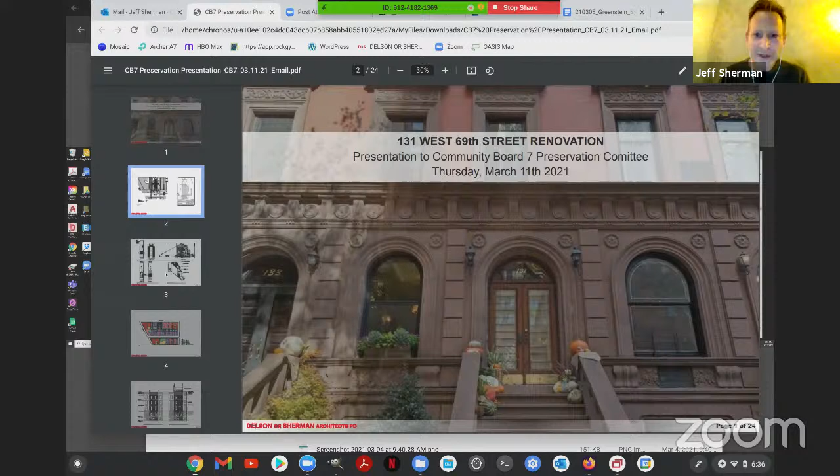Okay Jeff, you'll make the presentation? I will, thank you so much. I wanted to thank you for the opportunity to present this project to you tonight. I will share my screen with you now. Oh, Susan is also the woman who looked at the site. This is the front facade of the project, 131 West 69th Street. Our renovation includes a rooftop addition and an extension on the rear. You can see them both modeled there.

Excuse me Jeff, for interrupting. Yes. But I found when I was looking at the first version of these slides, the print was kind of small to begin with. If you could please use the view setting so it's more full screen, that would help us a lot. Absolutely, or at least it would help me a lot. Thanks, and maybe I can zoom in a bit too. Great.

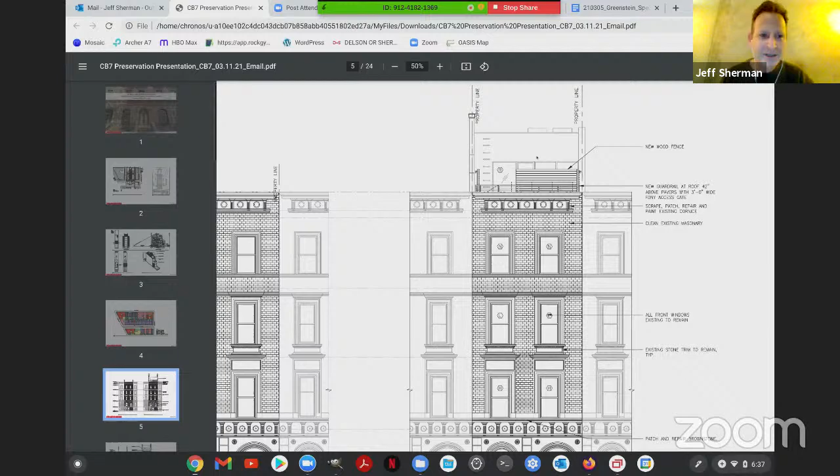You can see the front facade really, the only thing that changes of note is the addition on the roof, which is set back from the street to the point where, at least from the other side of the street, which you can see right here, that is invisible from the opposite side of the street. Although you'll see from the mock-up photographs that some of these extensions of the neighbor's flues are visible.

Can I ask a question right away? I'm sorry to jump in, but are the mock-ups still up there? They are. I guess you're pleased to hear that because I tried very hard to see them. They're up there, and they'll be there at least for a month.

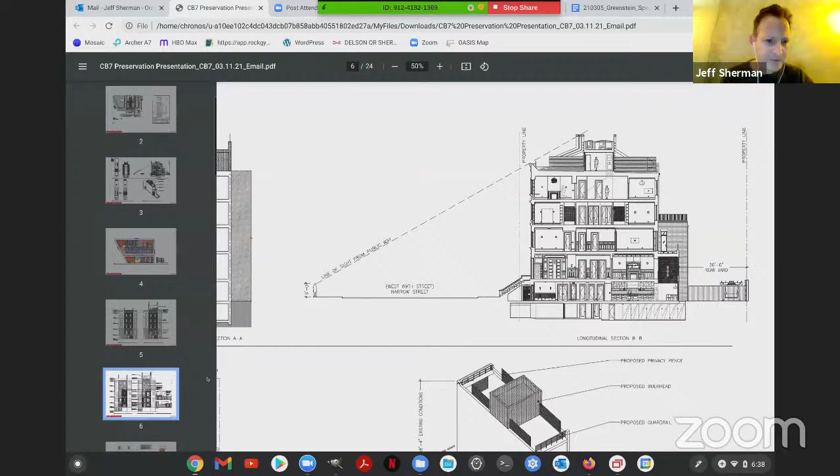So let's see, the other thing to see is... Is there a way to get rid of the preview panes on the left side of your screen? Yes. There we go. Great.

This is the existing rear elevation, and this is our proposed rear elevation. So we're adding a small extension into the sort of crotch of the building, and there you see our rooftop extension as well. We're increasing the window sizes at this rear extension, and then there are perforated metal panels between the windows here.

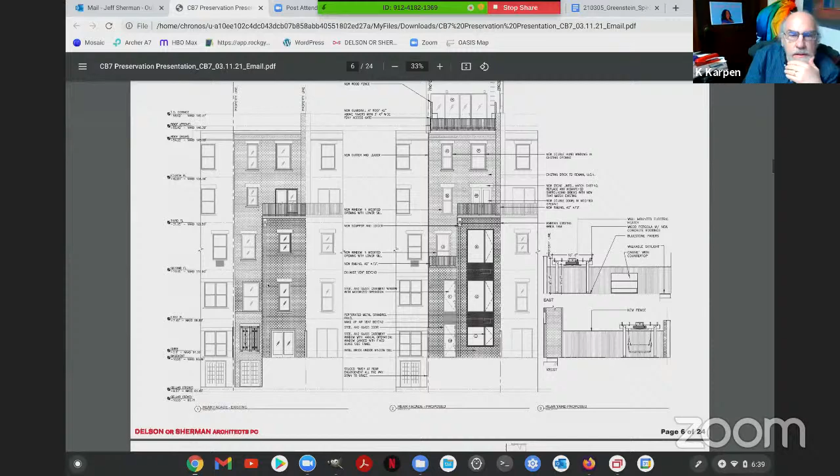So on those two floors, are you filling in where the L is? Is that what's happening? Does it come out to the face? Yes, we're filling that. Actually, it doesn't come all the way out to the face of this wall, it's set back a bit from there.

Why perforated metal panels as opposed to masonry? Well, part of it is to sort of unify the fenestration on the addition, but we also have quite a bit of ventilation that we need to get in there, and so the perforated panels allow us to hide a lot of ventilation, so that you're not seeing a bunch of grills on the rear facade. Gotcha, thanks.

We're also, I should say, adding a series of outdoor decks. There is an existing one there, but up on the rooftop, we're adding a deck. And then down at this level, we're also adding a deck.

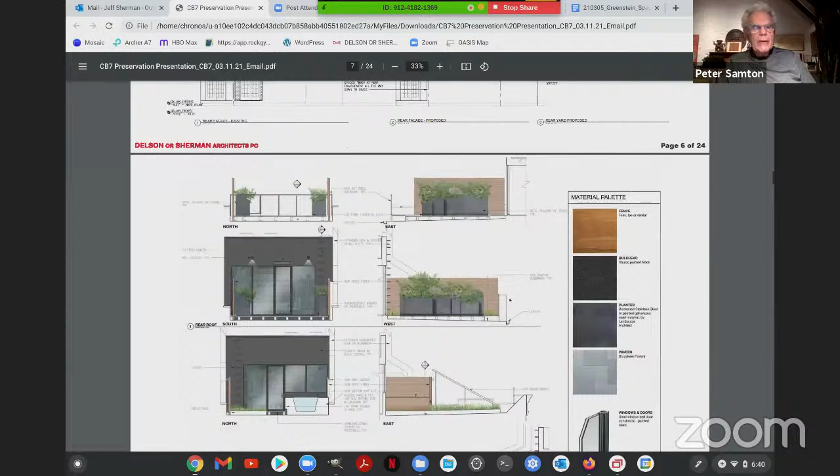Some renderings of the rooftop extension. It'll be black stucco with some matching black metal planters.

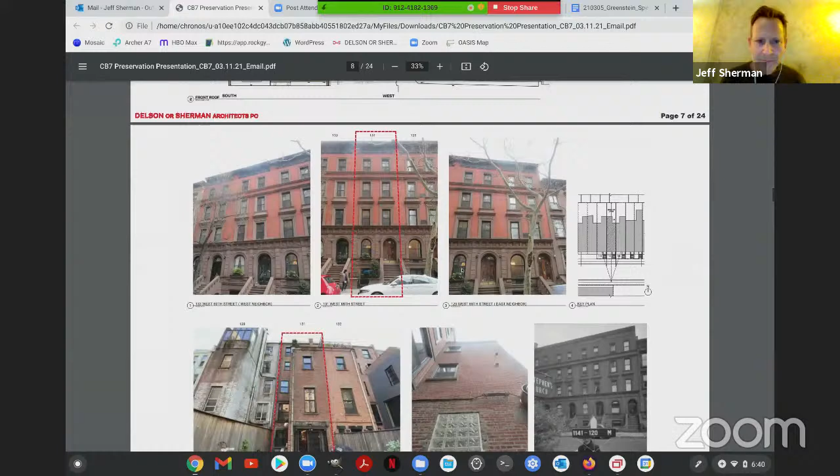Some contextual photographs to show you the existing building and the block, and some more photographs of the rear, the tax lot photo as a point of reference.

A series of window details that I'll scroll through because I'm not sure how interested you are in the window details. This is basically replacement windows at the front facade.

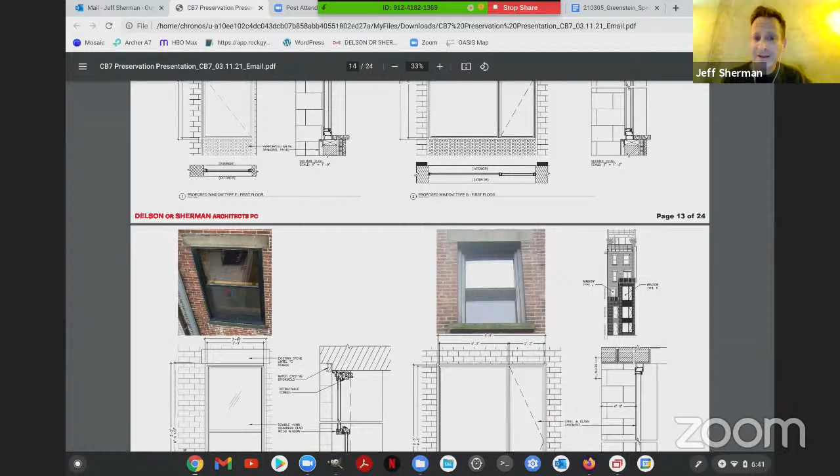Are the windows on the front facade being replaced by a staff level approval, or are we asked to comment on that? I believe that is a staff level approval, although they haven't confirmed that with us yet. Are you replacing them with... well, maybe we should ask, in case the LPC says that we should do that.

We are replacing them in kind, so we're not changing the size or shape or type of the openings. There will be new wood, painted wood windows with matching brick molds, and they're double glazed and in better shape than the existing windows, which are kind of falling apart. It's painted the same color? Yes.

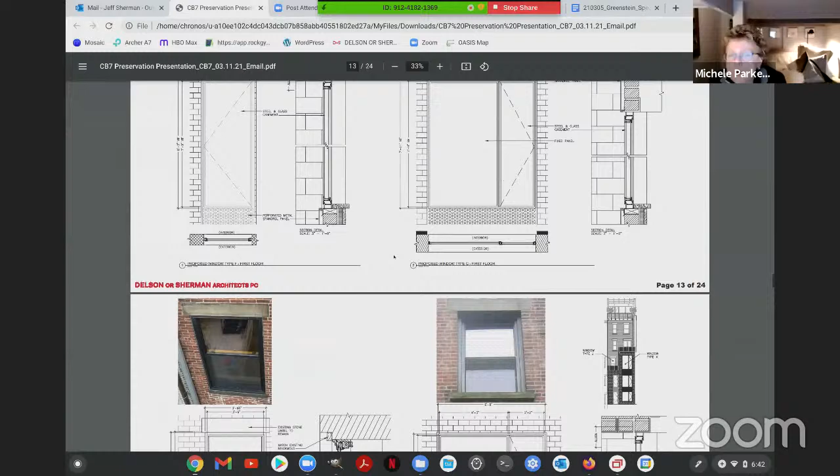These are the windows on the rear. Proposing those will all be replaced by larger windows, at least on the extensions. In the base building, the window sizes are pretty consistent.

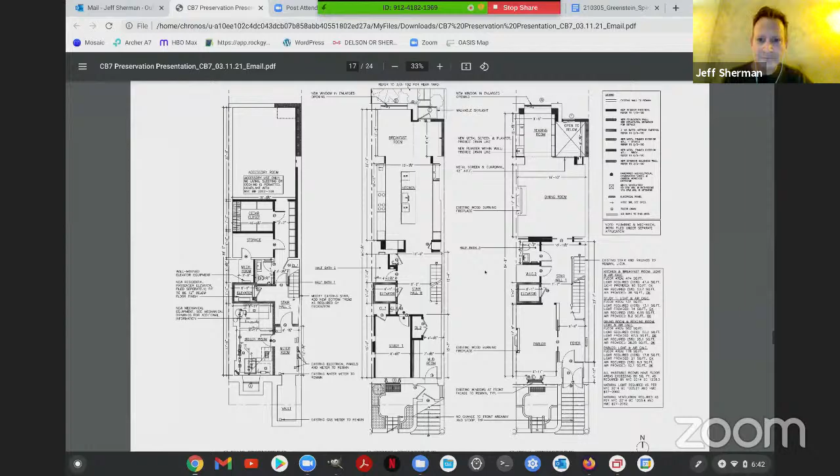And the floor plan, which shows you where our new infill extension is going to be here. And is this a single family? It is a single family house.

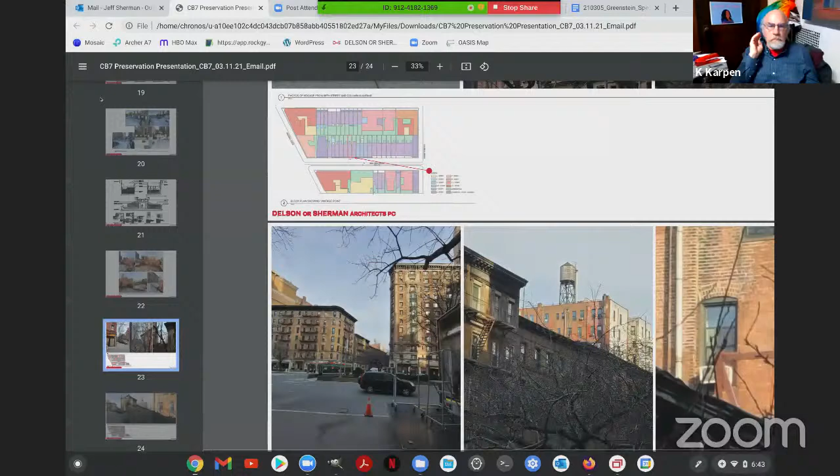This is the roof plan. The top is, sorry, I'm having trouble scrolling without my... yeah. This is the reason for having those key. Let me jump back to those for just a second so I'm not leaping all over the place.

That shows you the elevations at the roof. And this is the thing I think you're probably most eager to see, which is the mock-up on the roof.

And from the street, the reason you probably walked by and didn't see any mock-up is because it's only visible from way down at the end of the block. And what you're seeing here is in fact the flue extensions. There is a small corner of the bulkhead that is visible there, but I think the flue extensions will actually block your view of it, so you won't be able to see that little sliver. And that sliver is only visible from this point on the plan, down at the end of the block.

Can you point out where we're looking on these photos? Oh, well, you were looking here, so that's what you're seeing in this close-up right here. Does that make sense? Mm-hmm.

Let me give you a shot from the other end of the block. This is the opposite corner, looking in the other direction, and you can see flue extensions, but that's all you see. That's what this timber structure is, just the flue extension.

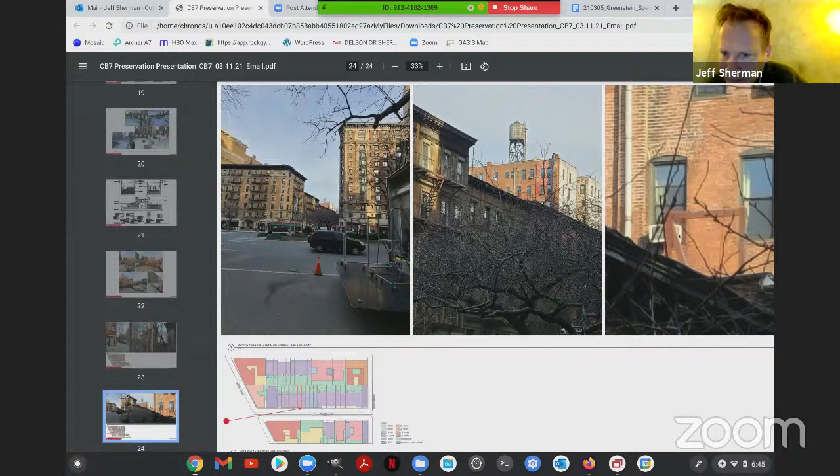That's part of the reason I couldn't see it, perhaps. Is it not orange? They were asked to wrap everything in orange construction netting. It's on an orange background, so it's hard to see - looks like it's just timber.

Let's go back so we can have another look at that - I think it showed the wrapping. Oh, I see, they've wrapped the bulkhead in orange netting, but I'm not sure they've wrapped the flue extension in orange netting. Jeff, why don't you navigate to slide 22? I think it should become clearer.

Well, here it does seem to be - so it has some on there. I'm not sure exactly when they did it, when they started, last week or whatever it was, but it's there now. I think that was a point.

And that's essentially the renovation we're proposing. Is there a particular image you'd like me to go back to?

I think we should go through the scope - your correspondence called it scope of work - and then ask from there.

According to your breakdown, the first bullet is asbestos abatement and landmarks mock-up. Will we have a say on asbestos abatement? No. And the landmarks mock-up, that's an LPC requirement. Yep, and it's there and you see it.

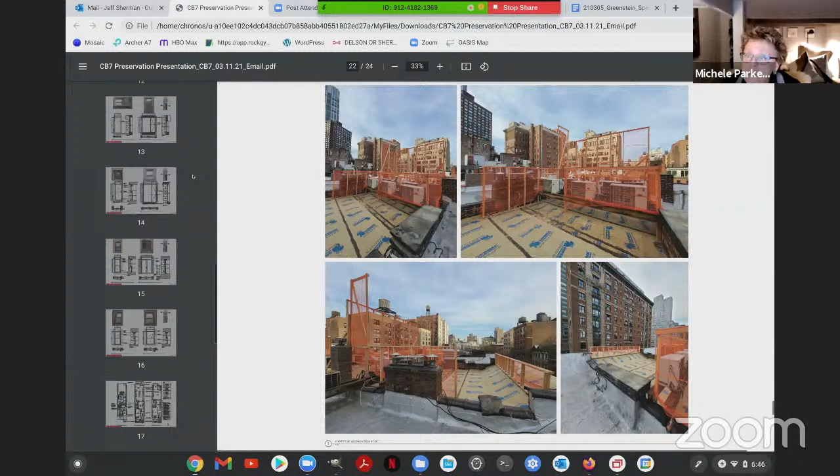While you're scrolling, can you tell us - it looks like the only windows getting enlarged are those two on the parlor and second floor, and then the continuation down to the garden level are the ones getting widened. Are there any others getting widened or enlarged?

Well, this one is going to be taller - we're keeping the existing lintel and just lowering the sill. I can't see where you're pointing. Let me zoom in. So that's a door now - yeah, to get out onto the deck.

Actually, I don't believe it's a door, because there is no deck there currently. So you're going to make a door? We are making a door, but the door is actually on the side wall. Oh I see, okay. But we are making this window taller by lowering its sill. Can you see where I'm pointing to now?

The window marked J - thank you, that's very helpful. So not that door - but why are you making that window taller if you have access to the door? It's really just to let more light in, because the room is fairly dark.

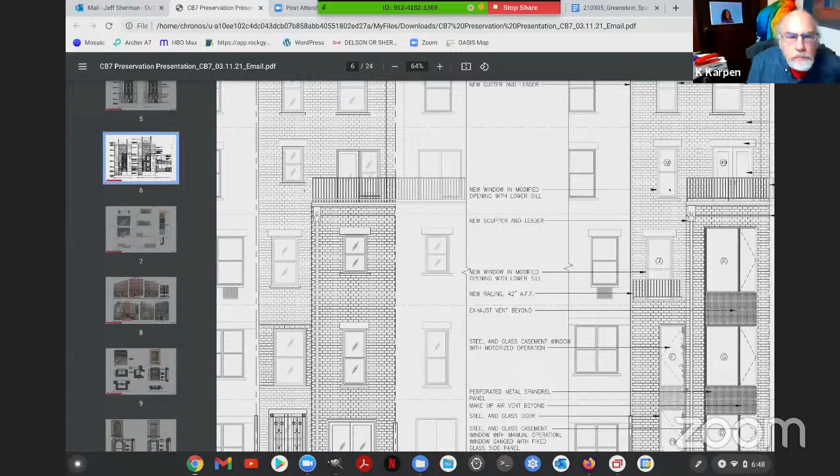I have a question - you're filling in one floor in the void next to the extension, is that right? Two floors. Two floors, okay - garden, parlor and the garden level, right? I'll zoom in on that so you can see.

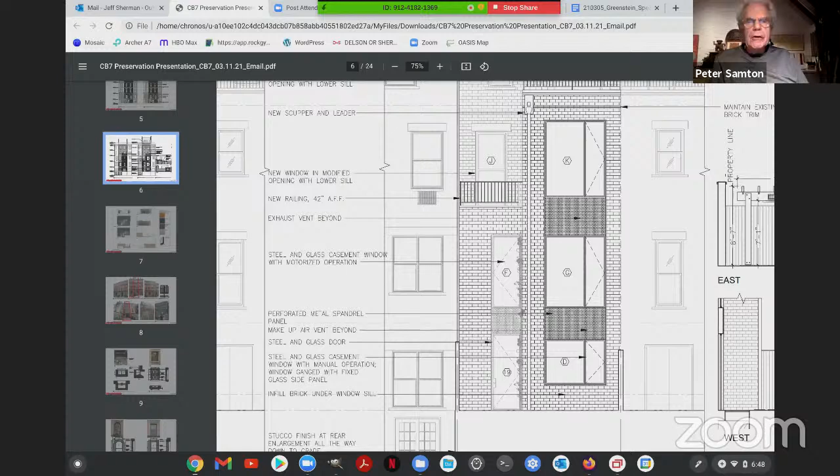And you show brick there - I assume you're going to try to match the existing brick. That's exactly right. How are you convinced you can do that? We found a brick that's virtually identical to the one that was used, and we're matching the mortar color as well.

Very good. Okay, so let's go back to - wait a minute, back to these windows. What kind of windows will these be?

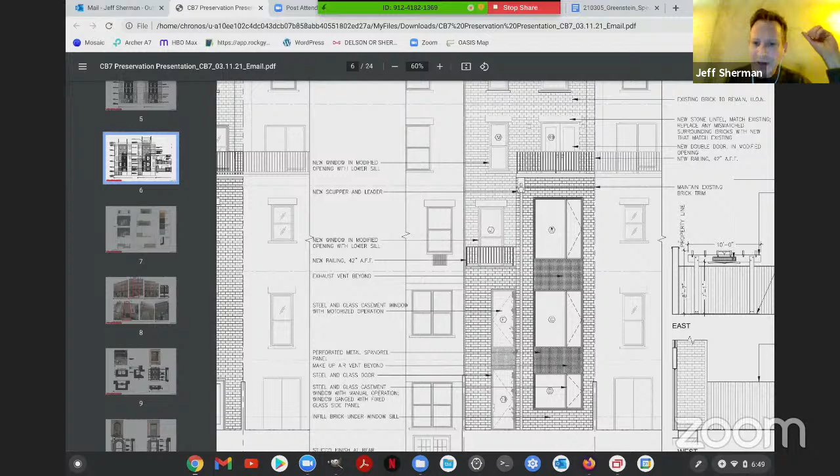And those are stationary panels, the large part? The large pieces are fixed glass, that's right, and then to the right of these are casements. I see, okay - and that's why you need the ventilation? The ventilation is for things like range hoods and air conditioning and that sort of thing.

And you said the metal framing is black? That's right. And the perforated metal is black. That's right. And the railings are black? They are as well. And the railings will be as simple as we see them here, very basic posts? Yes, that's exactly right.

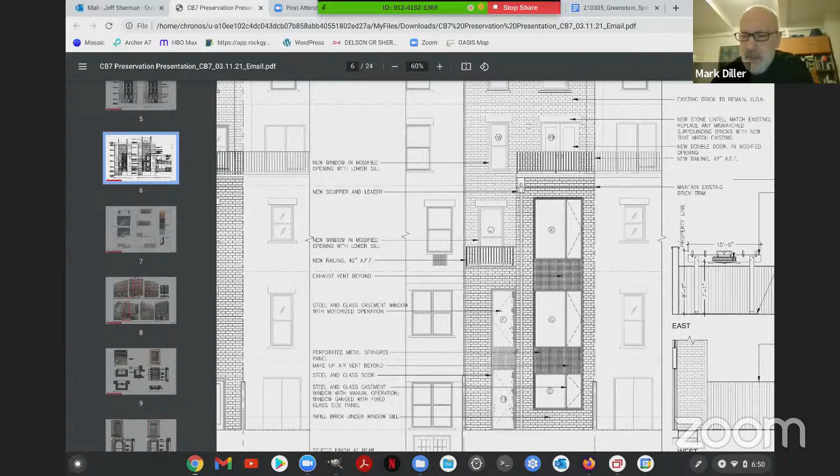Is there a detail through the windows that shows where the air conditioning is located behind? I believe in the grillage. Yes, thank you. Let me grab that for you.

Grillage. I don't know, Paige, grillage sounds like something that should be on a barbecue. That's on top of the, I haven't eaten yet, so it might happen. Sorry, have some grillage. You want to eat the food? I'll leave it, thanks, sorry.

So that's a section through so you can see the sill, but where's the air conditioning equipment? How is that installed? Because it seems very close to the floor. Yes, I'm just trying to scroll to the image that gives you that. Apologies for the delay. No, that's all right.

And all the windows are going to be painted the same, except for the steel windows? They will have the same coating, but it's one's aluminum and the other one is steel. That is correct. Okay.

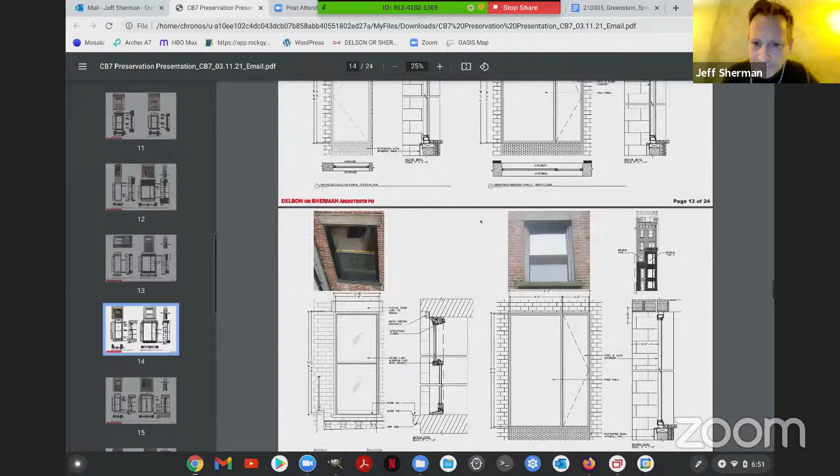And the reason why I'm asking, for the benefit of my colleagues, there's a very narrow wall when you have a 2 or 3 wide. It's probably a 3 wide brick wall, yes. And so there isn't really a lot of space, so presumably there will be a hole underneath the windowsill, and then the unit will slot in behind it.

None of these are through wall air conditionings, so it's merely a duct feeding to the back of these panels. And I apologize, all these sections were cut through the masonry and not through where the ductwork is. But we do have those details that I can send you. But there are no through wall air conditioner units.

The only reason why I'm asking this is not only technically to make sure it's feasible, but also rear yards particularly are subject to noise. So will these have dampening and whatever insulation you need so that neighbors won't complain? Yes, they certainly will, but we don't actually have any equipment that's pressed up against these grills. The equipment is located remotely from the windows, so we expect they'll be quite quiet. It was a concern not just of ours for the neighbors, but also for our clients who wanted to make sure the backyard would be very quiet for them.

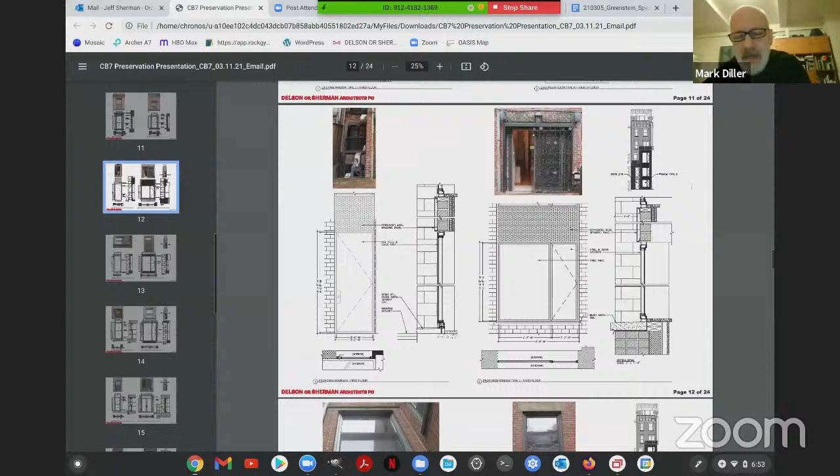Is that the mechanical room on the roof? There is a mechanical space on the roof, yes. But what is Paige asking about, how do you get air to this unit? There are interior air handlers, and we also have energy recovery units that will be exhausting and bringing in fresh air through these grills.

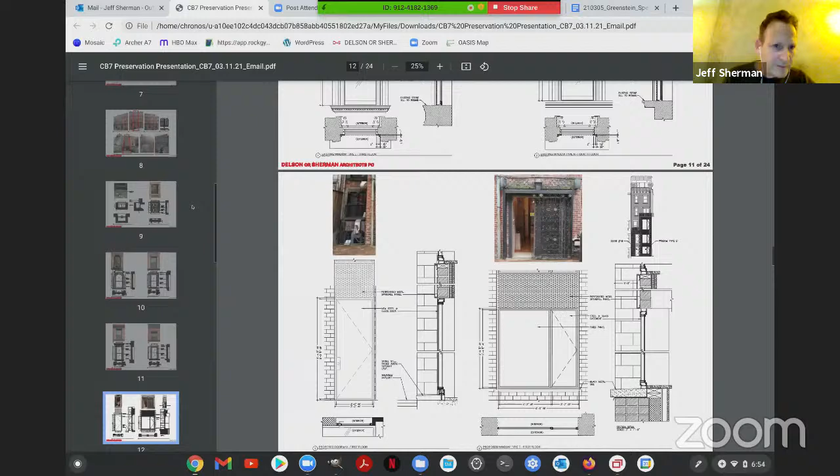And you're putting a fence on the west side? We're actually just replacing a wood fence that's currently sort of falling apart. Replacing it, is it a stockade fence? Kind of the standard, it's a little bit nicer looking than that. And I wonder if I have a photo that I can show you. I didn't see one on the plans.

Is the present fence also 6 feet, or are you replacing it with a higher fence? I think the current fence is actually taller than 6 feet, but I believe we're replacing it with a 6-foot fence. Yeah, that's what it says here. Okay.

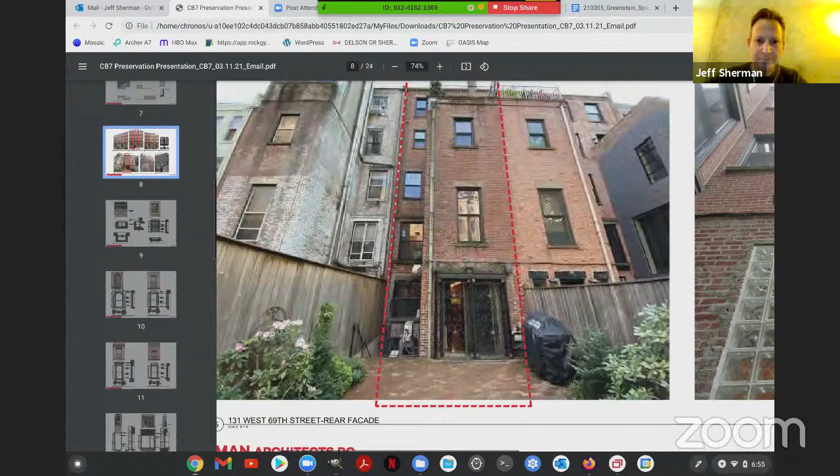So that door to the rear yard, that ceases to be, is that true? That's correct. Yeah, the new door will be back in our new addition. Got it.

Has that fence on the east side of your lot been there all along? Since my clients took ownership, which was less than a year ago.

Now that you have that picture back, is that a handrail to the basement? Is there basement access, or is that floor level? There is currently basement or cellar access through there, but we are closing that up.

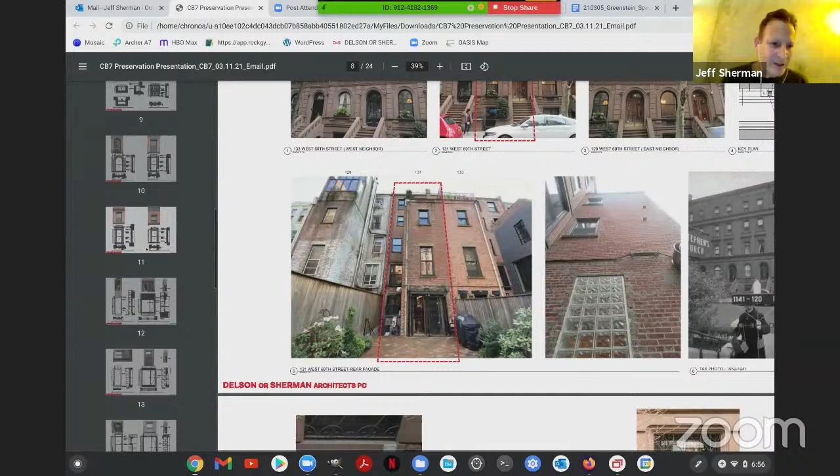What are you doing with the rear yard? There are a whole bunch of things planned for the rear yard. Let me go to the plan for you. You can describe it. Well, my interest is in permeability.

Oh yes, the vast majority of it is going to be permeable. It's mostly planting, and the paved areas are spaced pavers. Let me zoom in on that. So the only area that's not permeable is this section, which will be paved in bluestone on a solid plinth. Everything else is permeable. These are loose pavers with soil between them and space for plants to grow. So all of this zone and the full perimeter will be permeable.

Okay, thanks. Can I ask a silly question of my committee? Does anybody have, not a problem, but could you articulate why you're not asking more questions about the addition in the rear, which will be one to two stories to fill in that area? I have a question about it actually, Michelle, if now's a good time, I'll ask it.

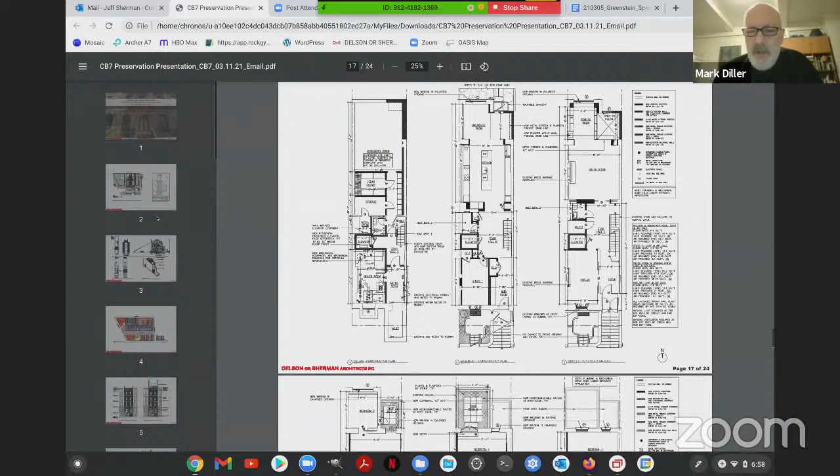The first question I have is, am I correct that this lot is a little less than 100 feet? I was trying to do the measurements from your drawings and it looked like an odd number of inches or feet. Usually it's 30 feet from the rear lot line, and this one seems to be 28 and change, if I'm reading it correctly. Is that because the lot itself is smaller? Let me see if I can get the dimensions of the lot for you. The lot is a little over 100 feet, so 100 feet 5 inches.

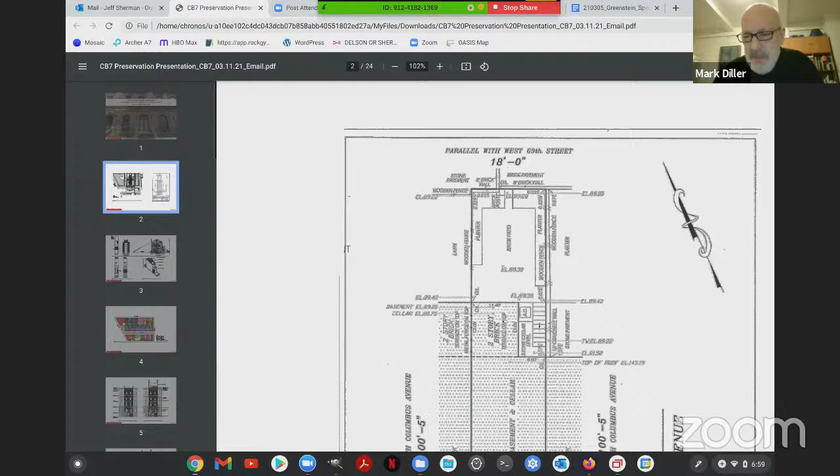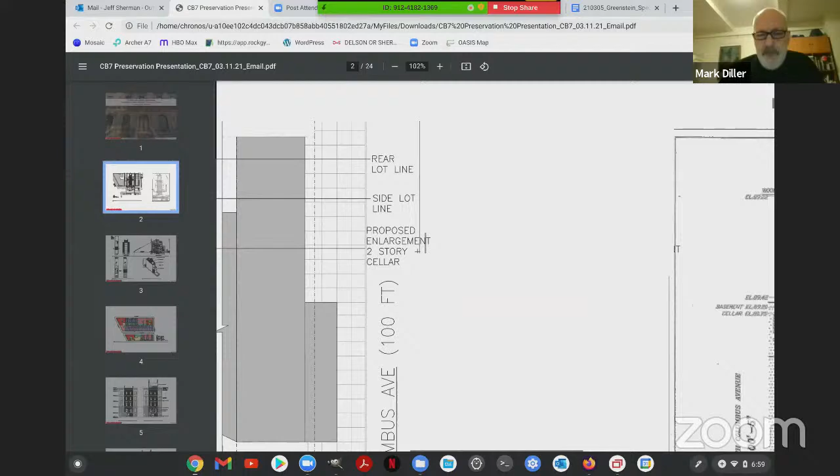I'm trying to remember the history of it. I think it's quite likely that we did set that at 30 feet from the rear lot line, and that's why it doesn't align with the existing rear extension. Got it, okay, so it's not complete up to the current extension. It definitely doesn't go up to the existing extension, and it can't by zoning — it must be 30 feet, or 30%, right?

And I was asking because there was what was in the plans as a skylight you can walk on. So the skylight will be on the surface of one of those new terraces. That's exactly right. Our committee has from time to time taken issue with people who erect theoretically temporary greenhouse structures that never go away, and there was one where you could even walk on top of it. But this doesn't appear to be that — this appears to be an as-of-right addition in terms of zoning, not one of these faux temporary structures. You're quite right, and I should say it is flush with the ground, so it is not a structure at all.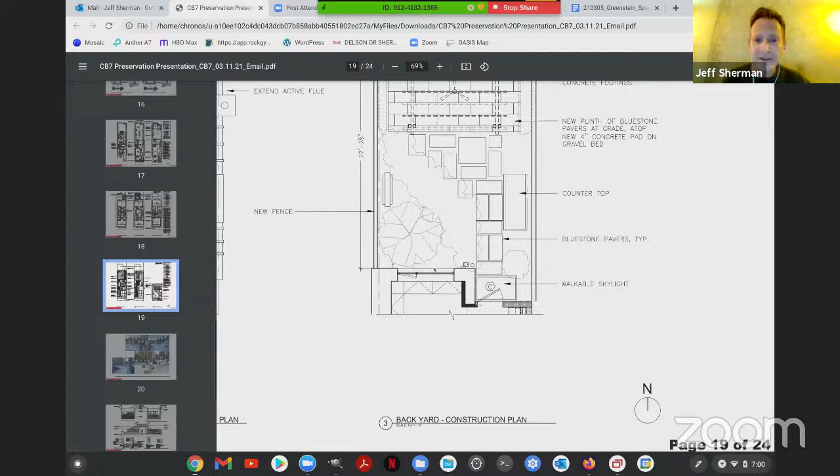The wall of the cellar, the foundation wall, will extend out to align with the current extension, and that we are allowed as of right. And that's the excavation you mentioned in your description? That is correct. And that's to bring light into the cellar level? Exactly, exactly.

And this rear yard faces south? No, it faces north. Faces north.

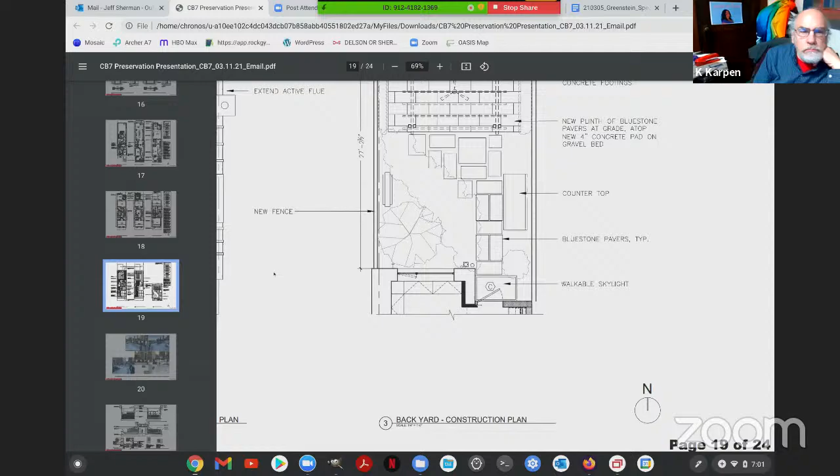Okay, let's talk about the rooftop, because that was another area of interest. We'll start with the picture. Is there a similar bulkhead in the buildings to the left or right of this structure? Oh, there are, and I wonder if we have those photos handy that I could show you.

And the purpose of this bulkhead is to contain the staircase. That's correct. And any equipment? Mechanicals, yes.

I'm afraid I don't have a photo of contextual bulkheads from the neighbors, but we can provide that. Okay, that'd be great.

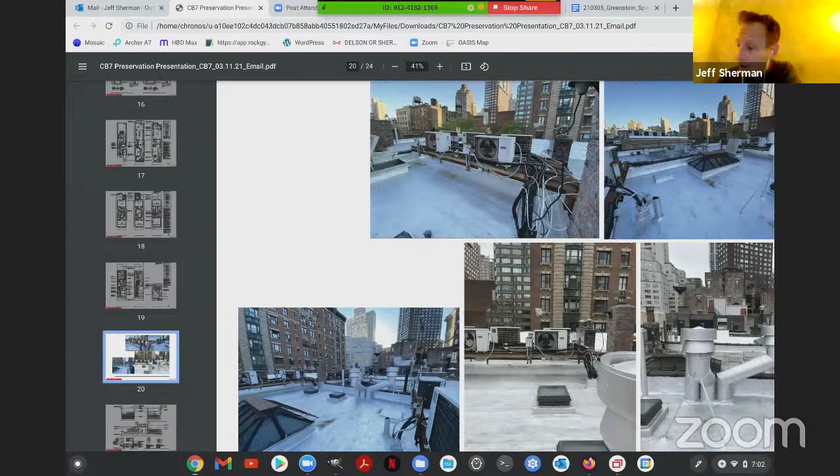I'm not as familiar as I should be tonight with your plans, but are you planning to put an elevator in or no? We are. So where would the elevator bulkhead be located, if you could bring that plan up? I will bring the plan up, but I should also mention that the elevator will not go all the way up to this level.

We can't get a residential elevator that can go that great a travel distance. So the service for the unit will be at the upper level, but you can't access the rooftop. That's correct. Thank you. The elevator can't access the rooftop. Correct, but the override for maintenance will, yes.

And to the north, there will be a new roof deck, to the north? Yes, there will be a roof deck actually to the north and to the south, and I can zoom in a bit to show that more clearly. There's the hot tub. Yes.

Out of curiosity, how come there are gates to the east and west? Oh, thank you for pointing that out. It's a point of contention within my own office. It's not something we've ever done before, but they're getting reports that the fire department is going to insist on gates to allow clear travel to the east and the west. We've often put gates at the front and the rear to allow the clear pathway, but I've never heard of it being required to the right and left, but I'm being told now by our expediter that we will need that.

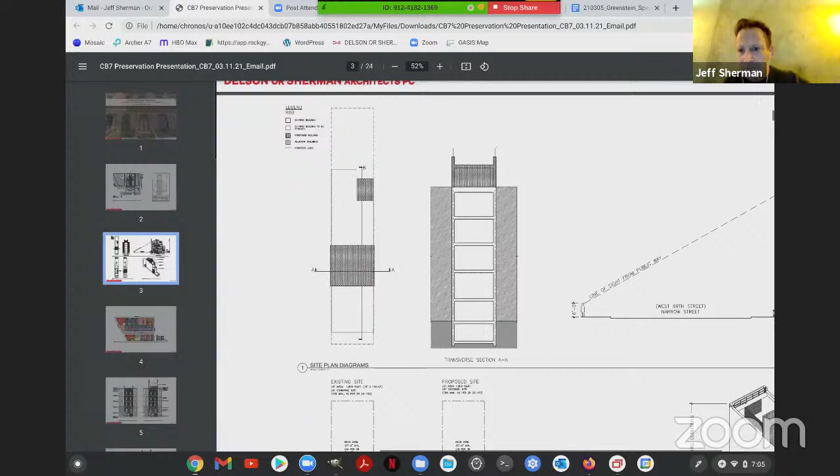So you're bending the flues so you can't see them from the street, is that right? Well, we're bending them back for a couple of reasons, to make them less prominent from the street, but also because they need to be quite high. They need to be 3 feet higher than our structure. And if we sent them straight up,

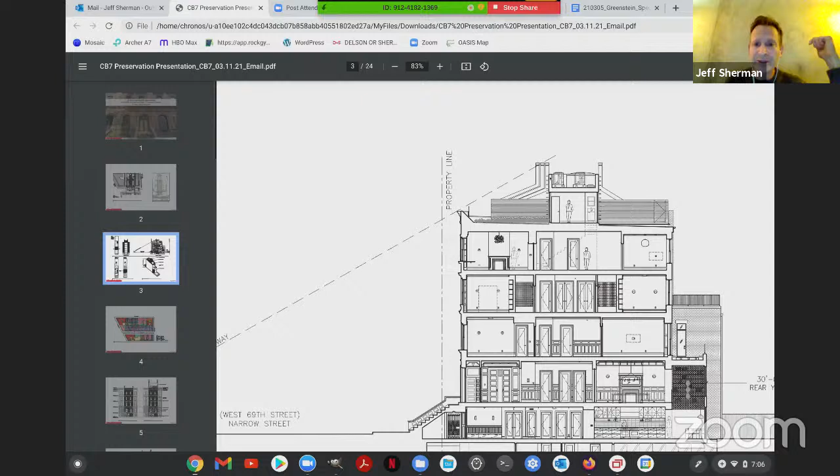you wouldn't really see them, yeah, there's nothing to anchor them to. So this way we can anchor them to the building. So all the mechanical equipment, with the exception of the solar panels, are concealed within fencing, actually within the parapet walls of our bulkhead. You can sort of see that here.

How tall is the bulkhead? With everything, 13? 13 feet sounds about right. I don't have the dimension in front of me.

But I'm confused, you're showing a turf roof, and then in the distance, presumably I'm now looking west. Yes. So where's the mechanical equipment? Behind that brick wall? Oh, the mechanical equipment is here. Oh, I thought you had some also on the roof deck in the front. Was I misreading that? It's underneath the solar panels. I see, okay, thank you.

Oh, sure, but it's not showing the solar panels there, right? Yeah, that's true, you don't see the solar panels in this section. Okay.

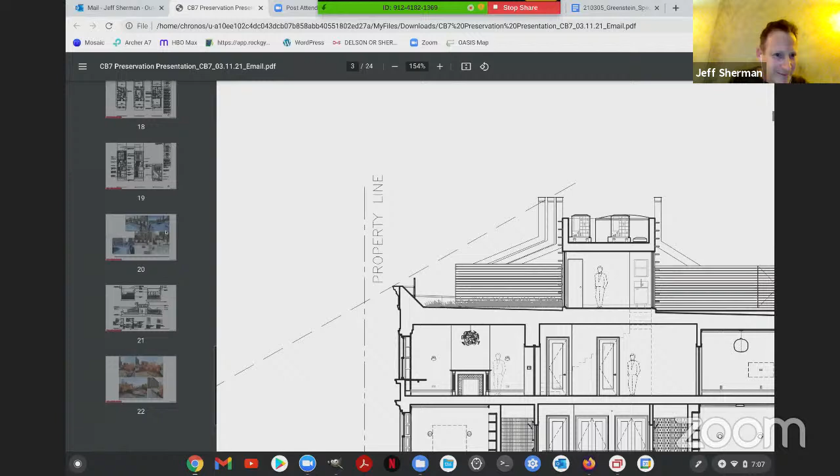So how's the grass going to grow? I can go back to the plan to show you how that works. Sorry to be you, every time you tell me an answer, it raises another question. I'm sorry. No, it's quite all right.

Okay, answer slowly. Well, the green roof is on the south side of the roof. Sorry, it's going to take a moment for this to load up. And there we go, so the solar panels are here, and this is the roof that's facing south, so these slope down towards the front of the house. This is where the green roof is that you were just seeing in that drawing, so it has a pretty unobstructed sun exposure.

Removable green roof trays - okay, those are the sample. The grass is growing in the trays. Actually, this arrow is pointing to the wrong thing. This hatch pattern here are the removable trays. These rectangles you see here, the four, are pavers that will be set among those trays. Okay, now I'm clear, no more questions about that area.

Thank you very much. And the materials on the roof, the roof bulkhead? Is black stucco. Oh, looked metal. Okay, there are metal planters that feature prominently in the back of the roof here on the rear roof deck. And they're black as well, correct? And they are black as well.

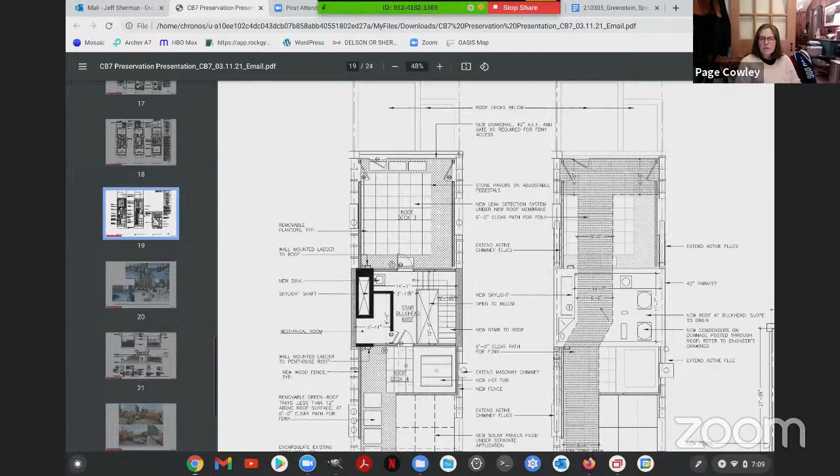Why was black chosen? It's rather unusual for an exposed roof that could get considerable heat gain. Well, the thing that's black on this roof are the walls at the front and the rear, and those are mostly window. So the amount of black we're talking about is actually fairly small. The place where you're worried more about heat gain is at the roof surface itself, and that will be a Kemper product that's very, very light.

I am, yeah, I am. Shall I stop sharing? Yes. Yeah.

Absent further questions, I would propose a resolution to approve the application as presented.

All right. Peter, do you have any comment, or Josh? So can we vote? Sure. Sounds good.

And there's nobody in the public, right? Let me just double check - anybody from the public here, we should ask. Okay, so Ralph, Michelle, Karen, John, David, Amanda, AA, and call-in user, this is your chance. Call-in user, if you want to raise your hand, it's star 9. Everybody else, please raise your little mechanical hand if you want to be heard. And your question should be focused on what was presented here, just on this project, on this 131. All right, I don't guess see anybody - ready to move ahead, nobody's saying anything?

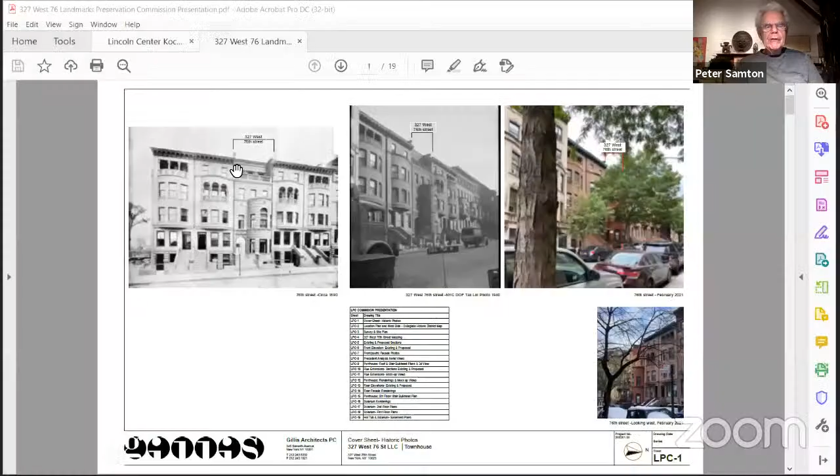So do you want me to pull up the plans or do you want to share your screen? Yes, those are fine, it might be a little smoother that way. If you show your ones, I have the same ones, so it might be easier. Okay, this is the building that was designed by Philip Johnson, correct? Correct, yes.

So these are the documents that we have prepared in the format for the Public Design Commission. They do have some information and context that's not necessarily necessary to this conversation, but helpful nonetheless. So I'm going to presume that everyone is familiar with Lincoln Center as a whole. Oh, I don't have control. We can go to the next slide.

Thank you. Peter, this is, you may know this as the New York State Theater building. Correct, as you're facing the fountain. Yeah, correct. It was formerly the New York State Theater until David Koch provided funding, and it has been renamed.

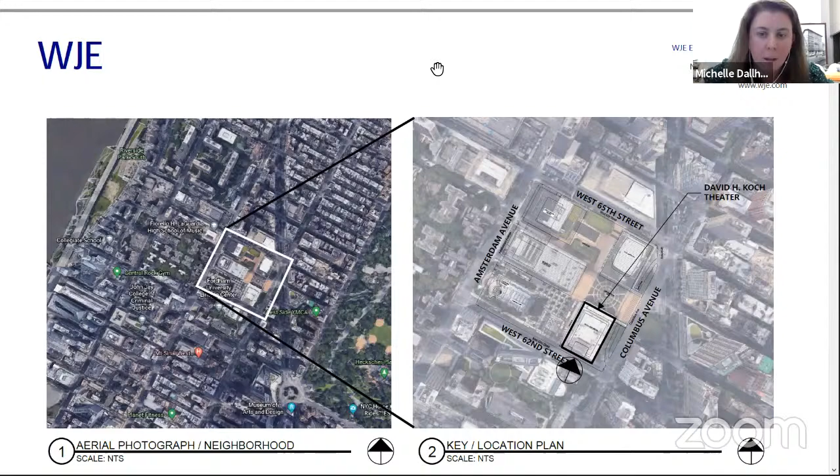So our involvement with the property, just to give you some background, was part of a routine inspection and for maintenance purposes. So we used aerial lifts to get access to the north, the west, and the south facade. We have not yet gotten the east facade, but that's just a coordination item related to some of the trees that are in the plaza area there.

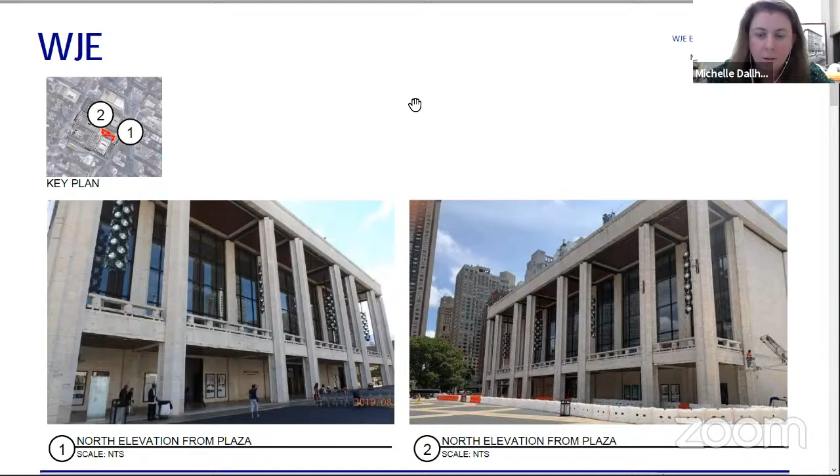And as part of this inspection, there were some conditions noted that we would like to address as part of repairs. So everything that we're presenting today is in-kind repairs. There are no modifications, additions, or aesthetic changes intended. We can go to the next slide, please.

But there's a lot more damage on that side. Not necessarily. There is some impact damage at the lower levels and some soiling. It may look a little different, but generally the conditions are consistent throughout the building and the facade. We have done visual inspections, but today's presentation is specifically concerned with our plans to do with the north, the plaza facing elevation. Okay, thank you. You're welcome. Next slide, please.

So these are just general images of the south. There's no current scope here. These were just full context images requested as part of the PDC.

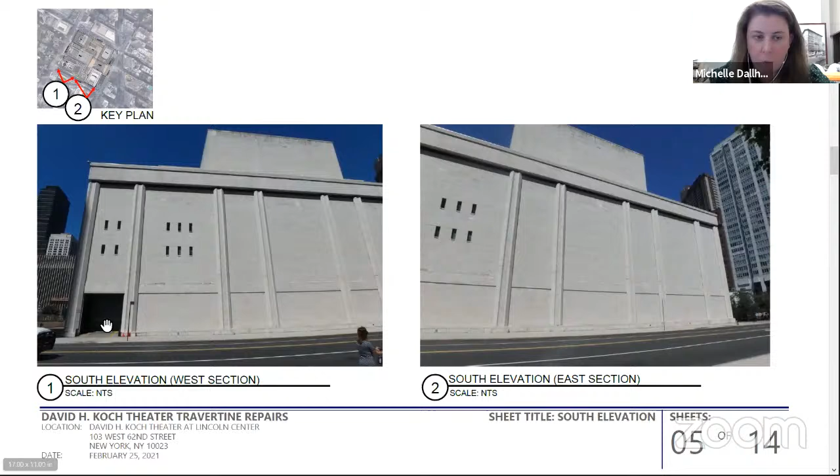Next slide. Those doors are made out of what? Is that for vehicles? The door, yes, that left door. There's actually nothing there, there's a roll-up door, but it's open in that image.

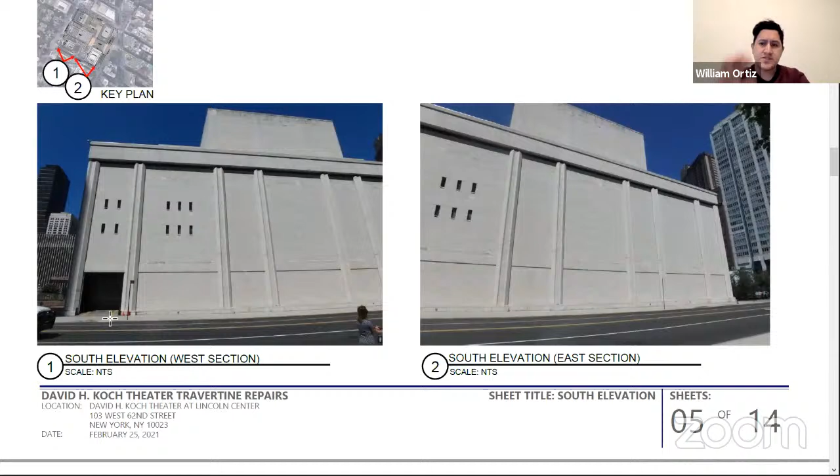Just to quickly ask, this is on the side of Fordham University looking at the building? Correct, this would be across the street on the south side.

You go to Fordham, right, William? I'm actually wearing my sweater right now. Go Rams. Go Rams.

As I mentioned previously, the scope of work for this petition is only at the north facade right now, to address some specific cladding conditions observed during our close-up survey, that being the uppermost band, which we're referring to as the fascia band, and a couple of miscellaneous items on the columns below. Next slide, please.

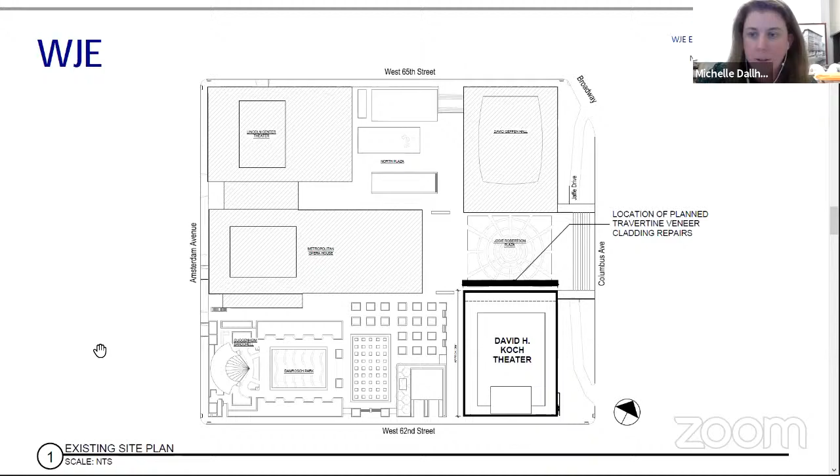So this is the fascia area, the upper part of your image with the shading. There are some later images that will better describe the existing conditions, so I'll hold off. But the scope of work intended — oh, that's okay, you can go to the next one.

So here you can really see the type of movement that we observed. The plan is to remove these existing panels, remove any underlying components that are corroded or damaged, and perform any repairs. Some of that is yet to be determined because we don't know what we will find, but we have some good information from prior remediation efforts of what we might find.

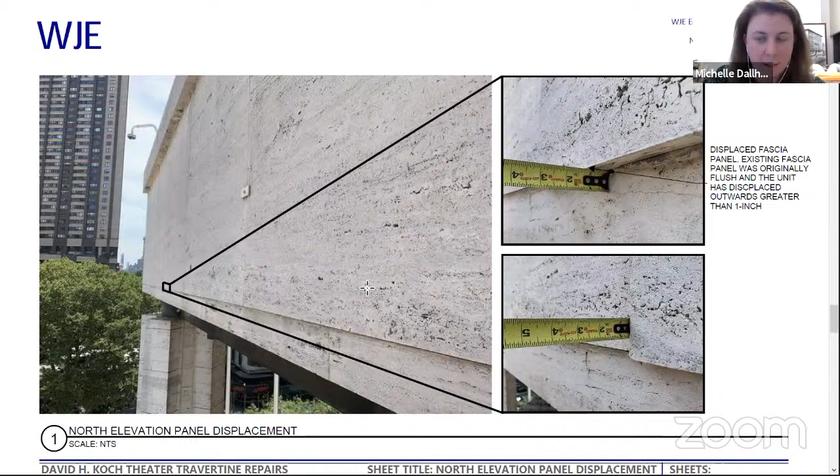Can you take the panels off? What's underneath it? There is, but I'm just curious. There's actually a section drawing, I believe it's the next image, which will hopefully clarify that.

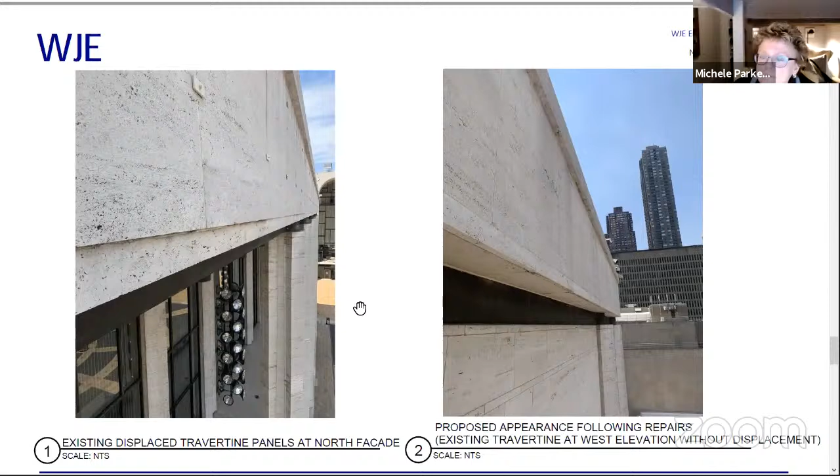Okay, here you go. So the left is a partial elevation showing the subject panels, and you can see the dotted line that represents the butt joint that exists but is not actually visible. And on the right, you can see the panel and then the cast concrete and the structural members behind.

There are different series of clips and pins engaged currently. There are dovetail clips in between the panels that split and sit into kerfs, some holes that are kind of buried into the edge of the stone to grab onto the stone and pin it back to the concrete backup conditions. And they also sit on a relieving angle below.

Some of the prior conditions that contributed to movement and distress were the use of ferrous shims at that lower shelf angle that caused movement, rust jacking for the panels to displace.

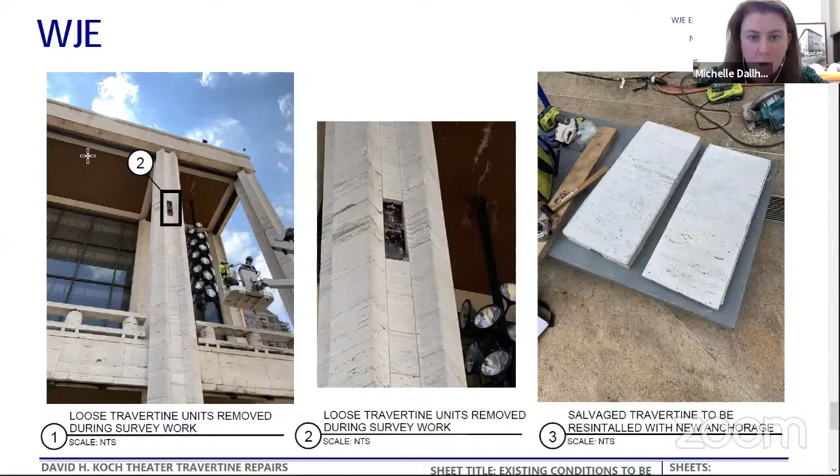Next page, please. So a couple of the small other items are to address panels that we found that were loose in place that had disengaged. These were 2 panels that I removed during that survey. There is a small portion of similar conditions at the north that we've designated that we're going to address during the course of this work. But again, they are going to be installed in kind.

And in this scenario, we have perfectly intact units that can be reinstalled into their original places. And that is pretty much our scope.

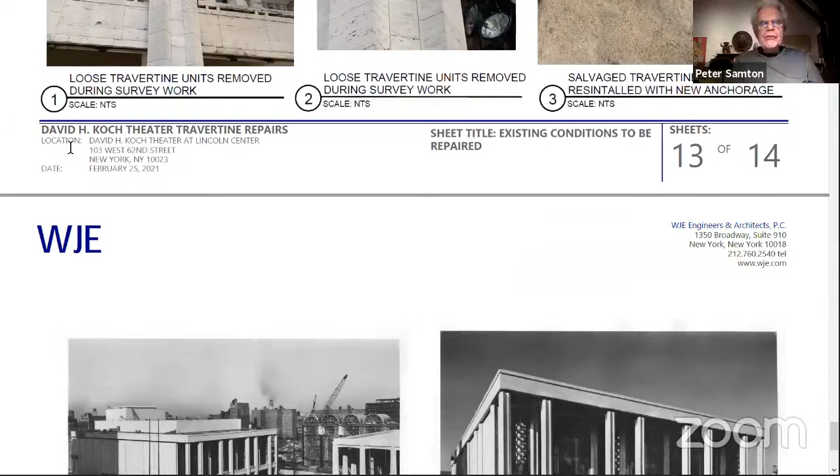Was this considered to be a dangerous condition? Is that why? It certainly has the potential of it. I'm hesitant to say that it's dangerous right now, but we have closed off the plaza as a precaution. So currently you cannot walk below these conditions, but we do plan to mobilize and remove them and stabilize the condition as soon as we're able to.

I walked there today, so you might want to tell your security people. They could have thought I was a crazy woman. Oh, you got in behind the orange barricades? Yeah. The plaza is open, and there is space between the barricades on the building facing side. You're able to walk through the underside. You're right, that's where I did the portico walk. Yes, oh yes, the portico is fine, just not out on the plaza in front. And no one would think you were crazy, Michelle.

Yeah, right. What's on the roof of the portico? What kind of material is that? Do you mean the underside, the ceiling? It's little ceramic tiles, like gold or copper. I couldn't see that. Yeah, they're copper colored. In the actual interior of the promenade, it's a gold leaf ceiling, but the tile you're looking at in those pictures is little 1-inch square ceramic tiles. Was that part of the original design? Yes, that's all unchanged since 1964. There's very little in the way of modifications, really, to any public spaces.

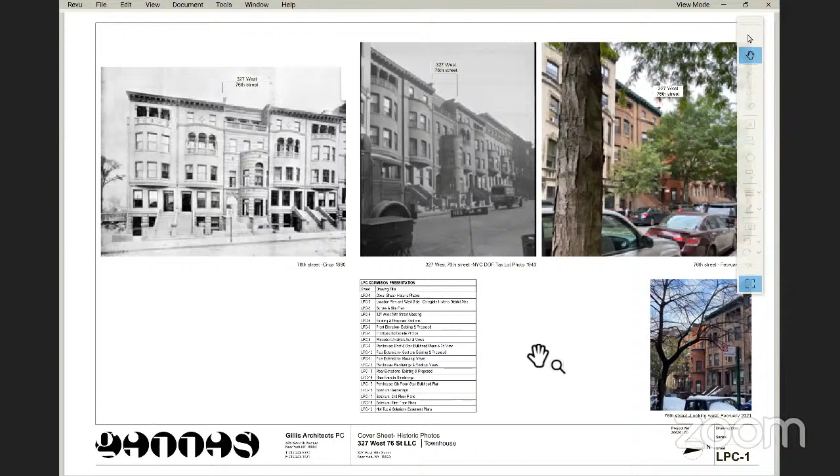Yes, there's mock-ups, they're in here. But they're on the roof now, and they're not visible from the street—I guess because I didn't see any. There's a tiny portion of the chimneys that extend above. If you stand immediately across the street from the building, for about 25 feet on the opposite side of 76th Street, you can see a very small amount of the chimneys projecting, but that's it. There's nothing else that's visible, and I will show you that. Okay.

Sorry, the refresh rate is very slow here. Don't worry about it.

The existing building, the lot is 22 feet wide and 102 feet deep. I'm sorry, the refresh is incredibly slow here. You want to see if mine goes any faster? Yeah, that would be great, Mark.

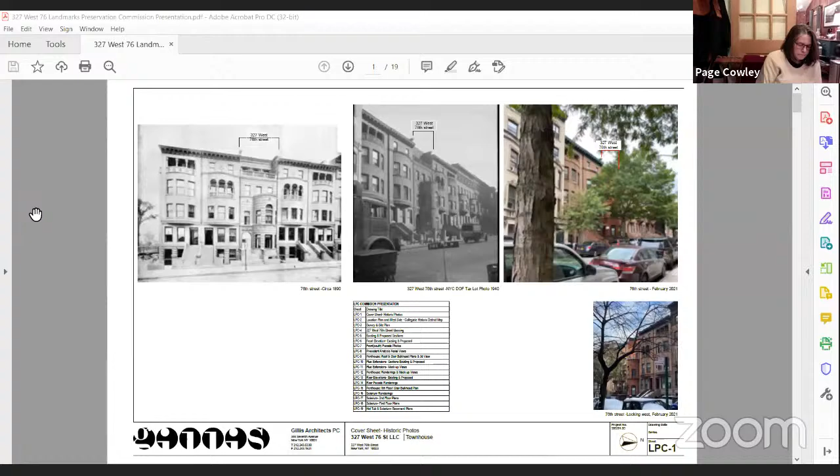The other 2 modifications on the rooftop and backyard are to replace an existing hot tub and expand the area of the penthouse bulkhead. In doing so, we are not increasing the height of anything. It's not visible from the street at all. In fact, the new penthouse addition area is actually below the elevation of the existing hot tub on the roof, so there's no change in height or bulk. There was also a mock-up of that, which you can see in orange.

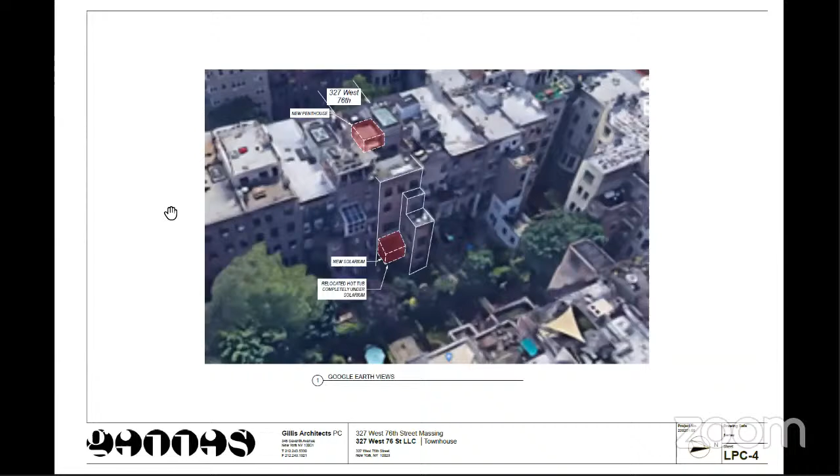The other portion is to add a new solarium on the back of the building. That is a very modest projection into the rear yard, intended to enhance the amount of natural daylight that gets into the home. There are lots of small children there who value nature and daylight and would like that experience in their home. It's a very minor addition, essentially over an area where there was an existing deck projecting out. You can also see that on the adjacent townhouse at 325 West 76, there is also a solarium that's much higher and much more prominent.

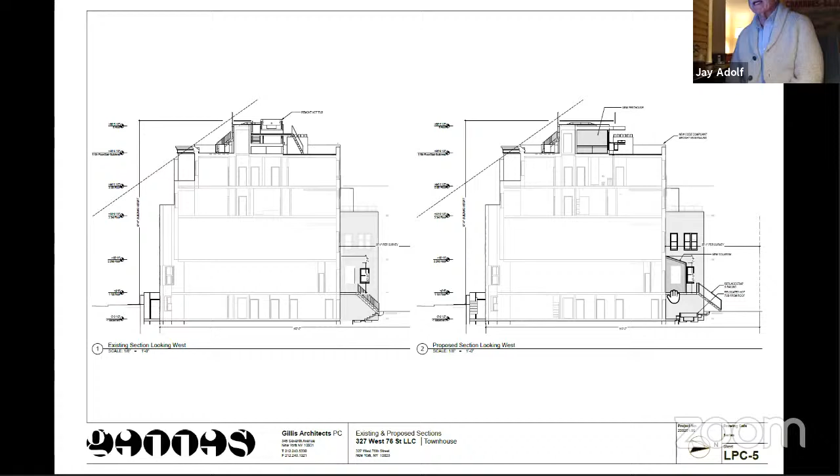And you can see the existing deck in the rear yard, and the new solarium structure that's only extending about 7 feet into the rear yard. The hot tub is being relocated from the roof down into the rear yard to make that a more private zone for the family. There's already a little recessed areaway in that backyard, so the hot tub will be tucked underneath there privately and won't change anything visible from the building.

No window changes, no door changes. There's an existing beautiful historic gate that is not being changed - it's all staying. It's a magnificent building, and the owner is incredibly appreciative that she's occupying this landmark structure. Her family loves the Upper West Side.

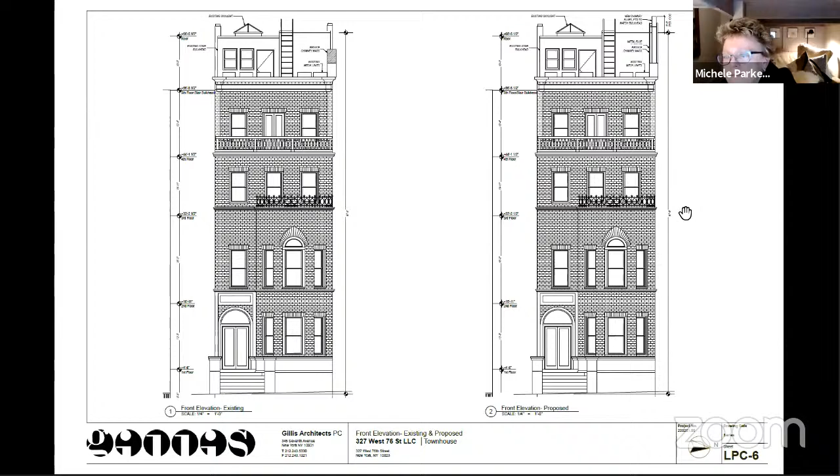These pictures are great, but the building is not flat in the front - you can see in the photographs there's a curved bay across the front. That's correct. Isn't that, not on the top of the building, but the next level down, a little patio there? Yes, that's also a balcony - again, no change. Just below that, that's not a patio, is it? It's really decorative - you can go out there, but I would not consider that to be outdoor space.

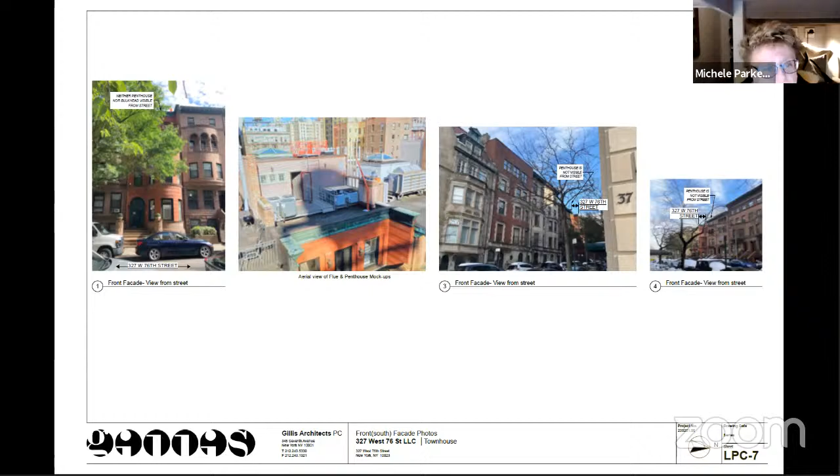So you can see, and then there are the other photographs from the street. Next, please.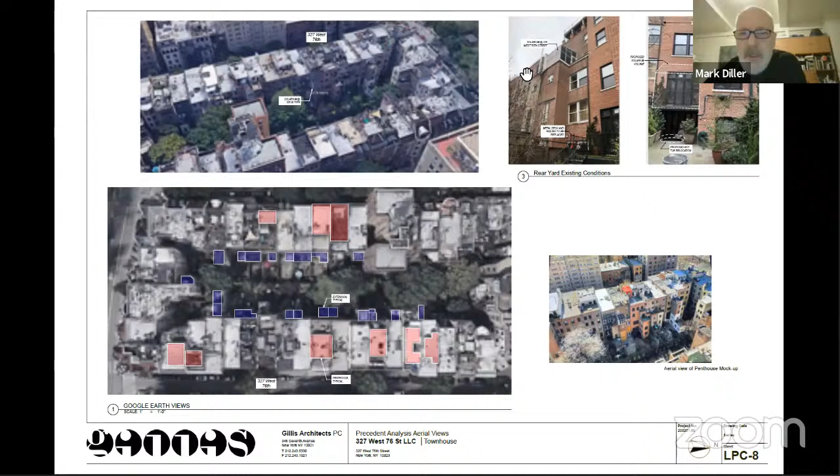Could you zoom in on that? Let me try. There are some renderings further in the presentation that might be helpful. Okay, thank you.

You can see the solarium. The solarium looks confusing when looking at the plans, because it now looks like the solarium starts at the parlor floor. So what's underneath it now? It's open, exactly that configuration. The solarium is exactly as it is now - there's that extension off of the parlor floor.

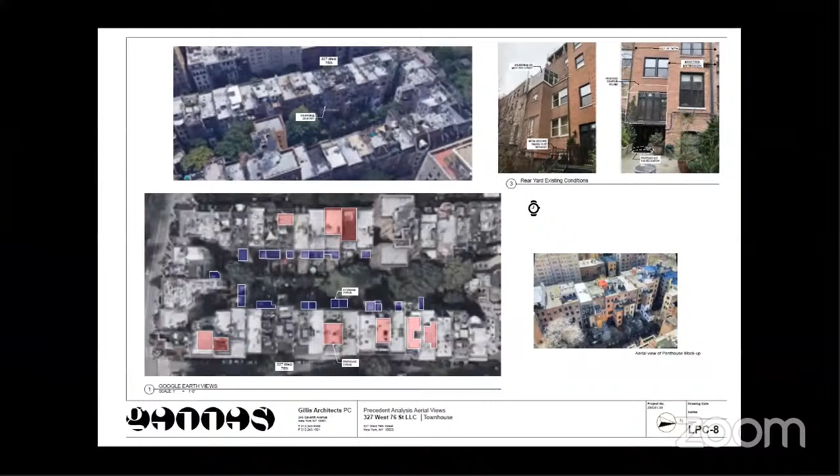But is this infilled in here, or is it? No, that remains open, and underneath that areaway is where the hot tub goes. So the solarium doesn't actually enclose the hot tub? No, that was my confusion. Thank you.

Next, please. This is just the roof plan again, showing the demo and removal of the hot tub, and the configuration is essentially unchanged.

Also, to be clear on the roof plan, all of the mechanical equipment on the roof is already there, on the left side, which is the south side of the building. It is not visible at all from the street. On the bottom are the little dotted squares, on both sides of that fire department stair.

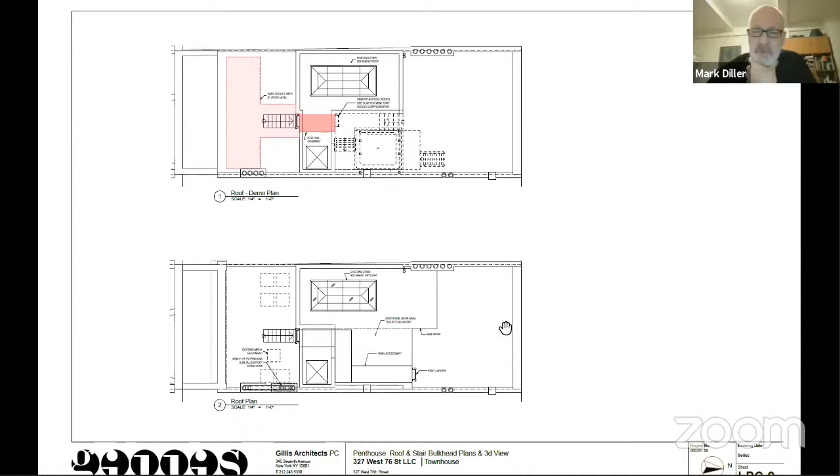So the thing you're enclosing is this area here? That's it, that's right. So you're adding about 200 square feet, as I remember. Correct.

Ready to move? Yes, please. This is a section again showing the offsets of the flues, through the penthouse. You can see here just the very minimal portion of the flues that are visible from straight across the street.

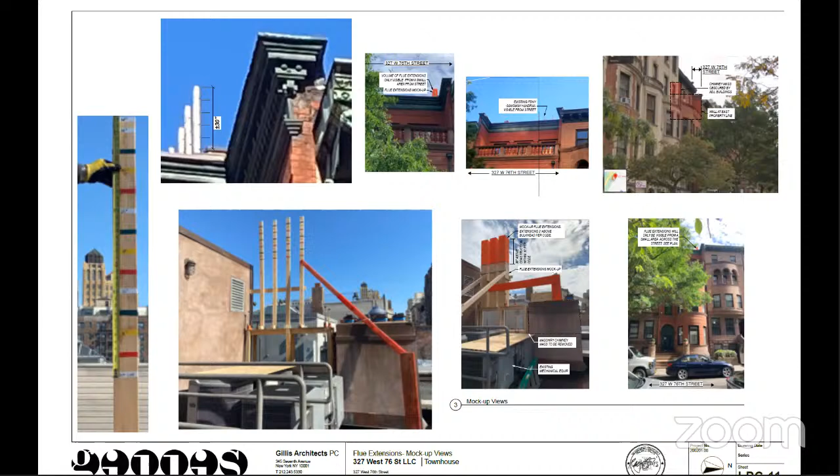Next, please. Here we go - more details of the mock-ups, which are still in place, and of the facade. We were very careful to take measurements in 3-inch increments, which you can see on the left, to determine exactly how high above they would project. We worked very carefully with landmarks to make sure it was accurately depicted, since there's great sensitivity about that. But it's a code requirement - we don't really have any choice.

Next, please. Here you can see renderings of both the existing conditions and the proposed condition, with the penthouse mock-ups in place - a little confusing to look at because the orange is wrapped around the existing hot tub. But the morphology of it doesn't really change; it's just modestly lower than the height of that hot tub now.

Next, please. This thing here is like a little porch that's going to hang over - is that like a wet bar or something? An outdoor kitchen. Okay. Ready to move? Yes, please.

Here's the rear facade. Again, the texture of the back is really not changing significantly. The existing extension - the left elevation is the existing, the right is the proposed. You can see there's already a previous renovation, an extension that projected out into the rear yard, with two balconettes and the main roof. The solarium encloses that area where the previous porch was, but it only projects about 7 feet from the back facade of the original building, not the extension. It sets well back from the extension.

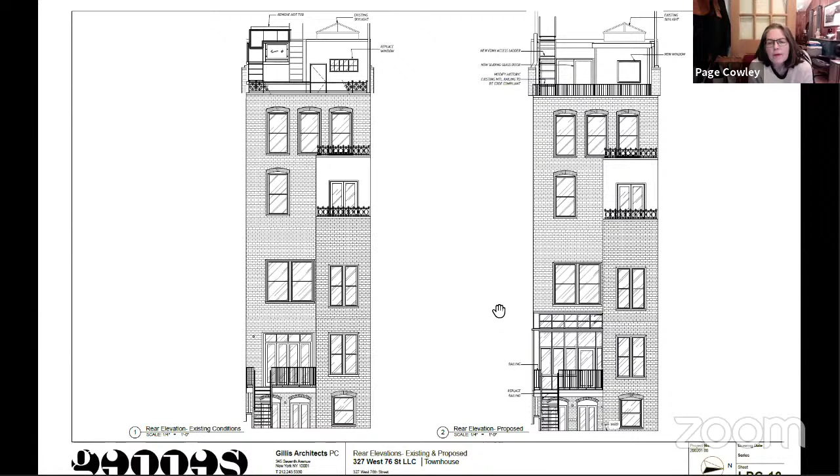Can you describe the clerestory over the new solarium and where the existing floor is? It's all glass, the sidewall would be stucco, as is the roof bulkhead. The existing roof bulkhead is stucco, so it would be a similar material and color to match the existing. The solarium itself would be an aluminum and glass structure. The existing windows on the rear are all black, so it would be a dark anodized to match - the existing windows have a very dark appearance, so it would be identical to that.

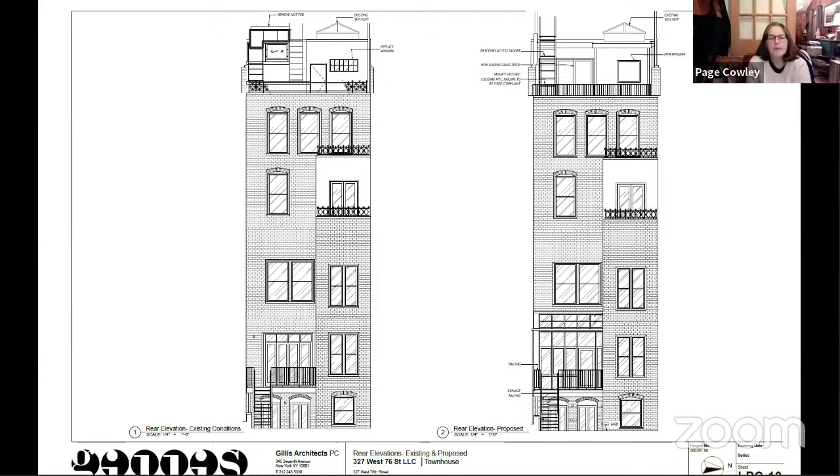There's no change to the floor, but if you're looking for the floor line, you can sort of see that darker line above the ground floor. That's the floor of the parlor, correct? Right. Is the floor above that slope glazing? Yes, correct - you'll see that in the renderings further on, which I think will clarify it. Let's look at the renderings, that should clarify it.

So again, here are renderings of the existing back and then the proposed.

I want to ask another question about materials on the 4th floor. There's an extension with its own terrace - is that also stuccoed? That is existing masonry. We don't know the vintage of all these projections and extensions. Is there any attempt to stain the brick or make it match the other parts of the house? No, that's not in the scope.

I have a question about the terrace and the stair that goes out from the new solarium - that stair and terrace moves out into the yard more, right? Correct. How many feet? The existing balcony is about 5 feet 6 inches, and the solarium will be 7 feet from the back facade, with about 3 feet in front of that - so it's about another 5 feet.

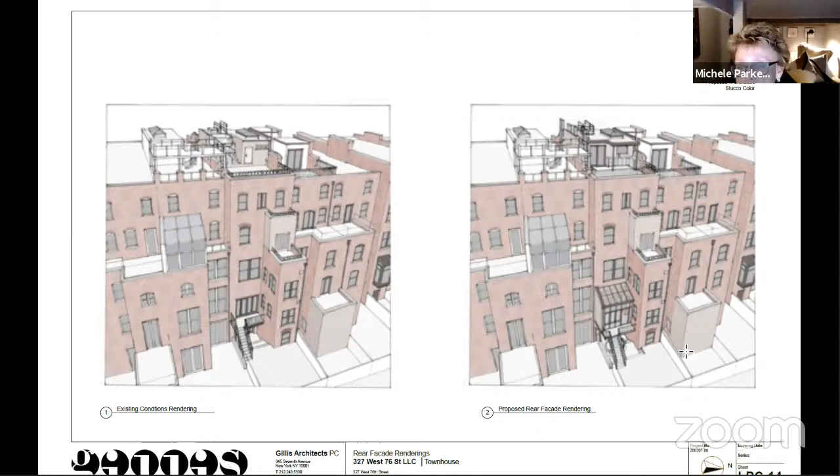That the solarium is a temporary structure - that's how we understood it. I don't think there's any proposal for this to be a temporary structure; it's a zoning allowance. How does that change things if it's temporary, Mark? I had a different understanding of what zoning allows, but I do know it allows it - I thought it was because it was considered temporary, but I defer to others on that. We can talk about that after we finish looking at the plans.

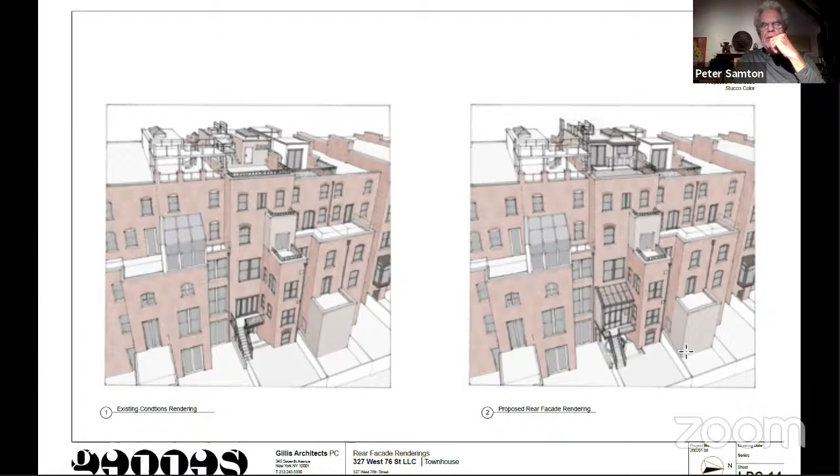But the side wall of the solarium is opaque, right? Yes, that's a lot line wall, so it has to be a fire rated separation - so yes, that's opaque. And there are renovations happening at 325, the adjacent building. We're not familiar with their plans - they have big openings in their rear facade right now, and they have a landmarks permit to do additional work on their facade in the rear as well.

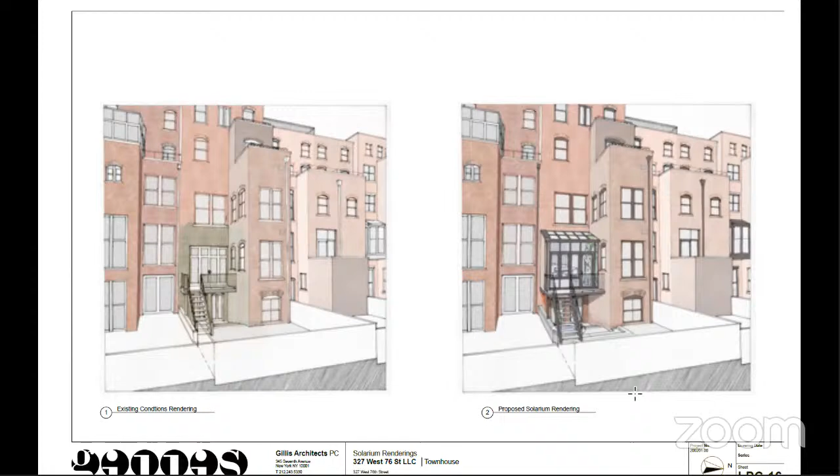Ready to move? Yep. So again, these are just technical drawings of the penthouse and the 5th floor - you can see the area of the penthouse. Next please. And then this is the solarium viewed more from the ground level, existing and proposed. And then just plans, technical drawings. Should I just move through these? Sure, absolutely - stop me if you want. That's all I've got.

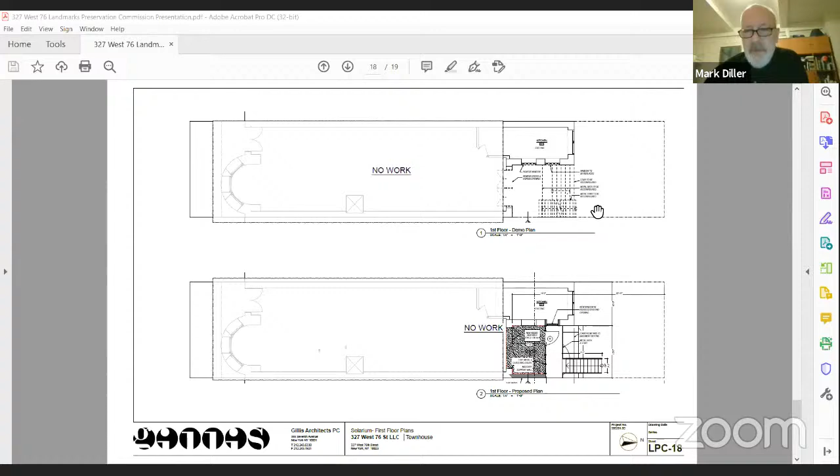Yeah, so it does come out a fair bit more. But it definitely projects more into the yard. We've seen that before though, haven't we? Yes. Yeah, I agree with Paige.

I'm sort of uncomfortable with this, if that's what you're saying, Paige. I'm uncomfortable with the precedent that it sets.

Well, particularly if you look at the rear yard, the architect did good service by showing us all the other incursions. But I'm just concerned that eventually these fill up. I live in a townhouse, as do other committee members, and that light and air, it's important to keep distance.

And somebody running up and down the stairs - if there was a way you could have the stair start where the solarium is and push the stair back, that would be better. I know you lose the purity of the balcony, but you might at least save three more feet of the stairs protruding into the yard.

It doesn't do much. I think we could certainly look at the configuration of the stair, since there's a sensitivity about that. I think there's opportunity to draw that back a little bit, but it is a permitted obstruction in a rear yard. But I have a suggestion.

Instead of having the stair go down completely the way it does in your design, why not produce a right angle and a landing and have it turn back onto an L-shape. That way you don't infringe on the rear yard as much.

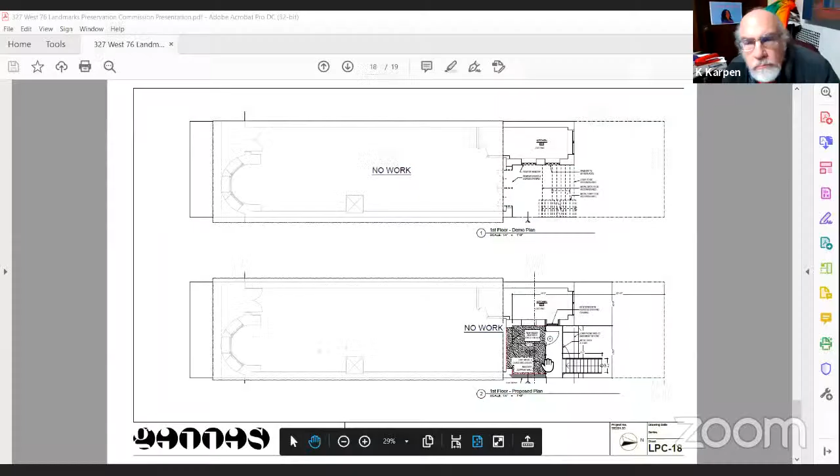It's a few feet on that side of the rear yard with an open stairway. We've approved many of these metal stairways into rear yards, and it's not really much of an incursion. I personally don't see it as too much of an incursion because of that.

I actually agree with Jay. Wow.

Madge has her hand up. If that little balcony wasn't there and there was a door from the right side of the solarium onto a landing for the steps, wouldn't that help move the steps back toward the house?

Yeah, I think we can look at this. I also think that the plan view of it is a little bit misleading in terms of the existing geometry of the site, because it's low to the ground.

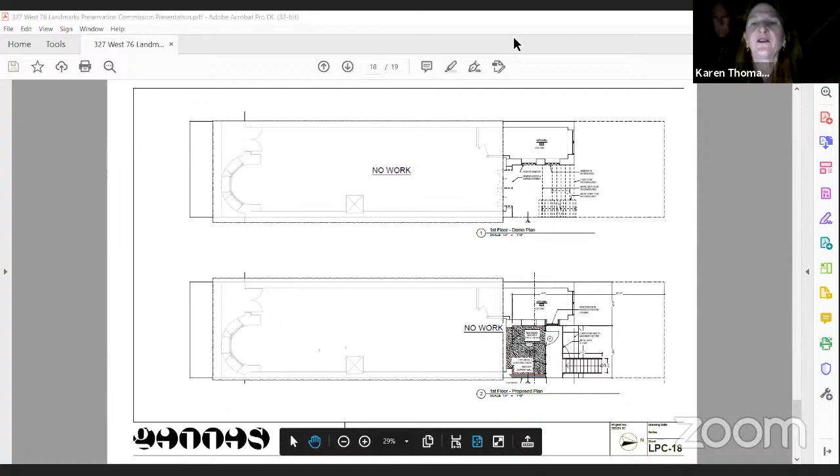If we moved it back marginally, you really don't see it from the... But it could be one of our recommendations. Yeah. Sure.

Anybody else? Paige, you have something else? William, I like Peter's thoughts on recessing it within the building line so that it doesn't incur further, and I agree with Madge.

So the recommendation would be to minimize or eliminate the landing/balcony so the stairs do not infringe anymore on the rear yard? Correct, something like that, yes. Or to reconfigure the stairway with a similar result - make an L-shaped stair.

Okay, are you on the calendar yet at LPC? Karen, yes, I'm sorry - are you calendared at LPC yet? Oh sorry, we are hoping to be calendared on April 13th. We're waiting for confirmation from them.

Well, we'll have it at full board. Yeah, that's good for us. All right, so Doug, did you want to say something?

Yeah, this may be erroneous on my part, but looking at one of the plans side by side, you're showing what looked to me like windows, but perhaps it's just a two-dimensional aspect of the solarium, where there were panels above on the right but not on the left. Is that just the two-dimensional kind of illusion?